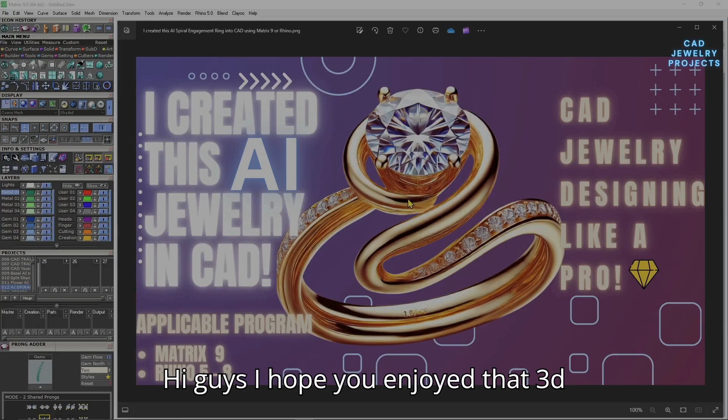Hi guys, I hope you enjoyed that 3D animation. Today we're diving into another jewelry design inspired by an AI spiral engagement ring.

Feel free to follow along as we transform this AI design to CAD production using Matrix9, and applicable to Rhino as well. Before we start, a big thanks to everyone watching and subscribing.

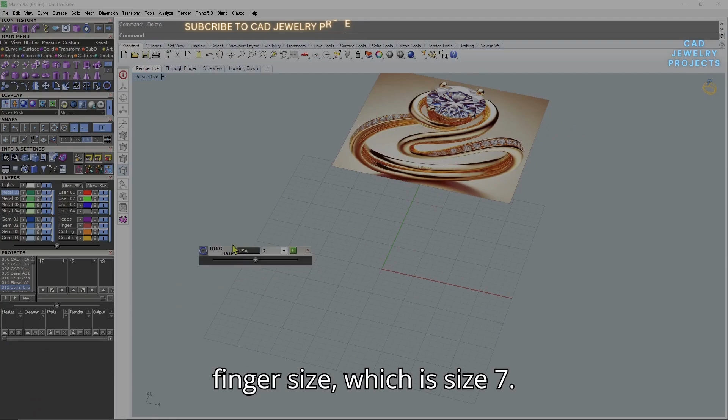Let's go ahead and start with our finger size, which is size 7. From here, let's go to through finger view.

Let's pull out our gem, I would say about 5mm approximately. Then from here, we want to raise this about 2mm from our rail.

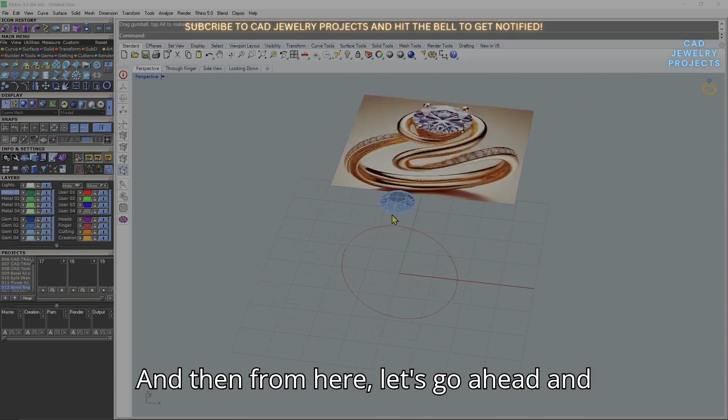And then from here, let's go ahead and create the 4 prongs we have. So from looking at the AI generated image, we got these 4 prongs. So let's go ahead and make that by using interp curve. Let's change it to color green so everybody can see it.

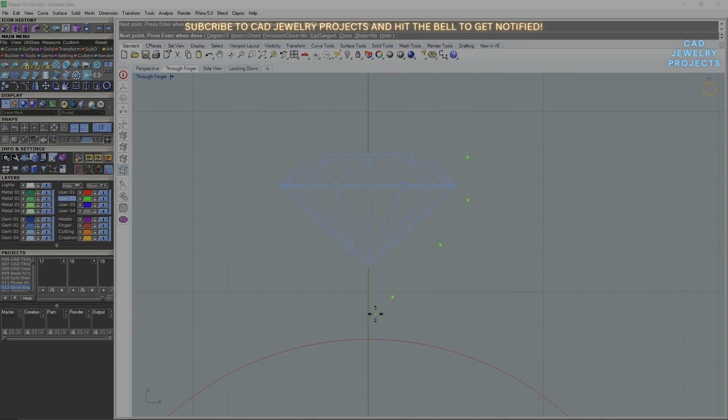I would draw it like this. So this is gonna be for production. So let's raise this up a little bit.

I would start with pipe, about 1mm on the top and then 1.5mm on the bottom. And then from here, let's raise this up a little bit for the center stone as well. Let's change the color of this.

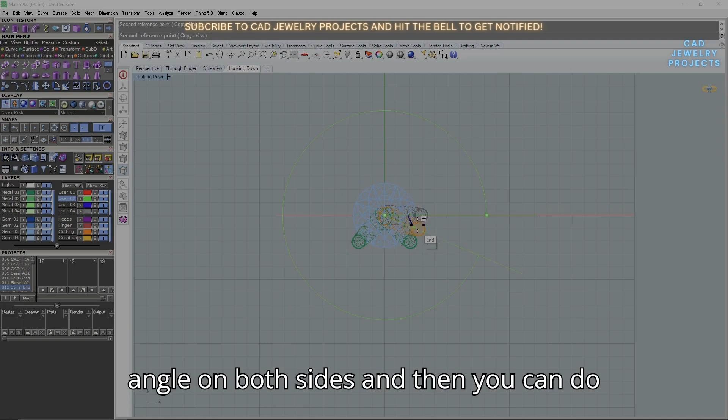Okay, and then go to the top view, rotate copy from a 45 degree angle on both sides, and then you can do the other side too.

So we got our prongs, and then from here we want to draw a cylinder looking at the top, about like so. Right here, let's put this up right here. Okay, from here, let's make this a little bit bigger.

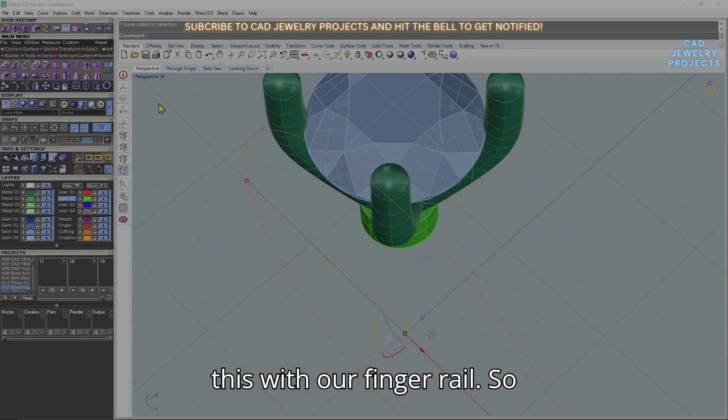And then from here we want to cut this with our finger rail, so extrude your ring rail and then boolean difference with our disc cutter right here. There we go. So now we can use a fillet edge, 0.25.

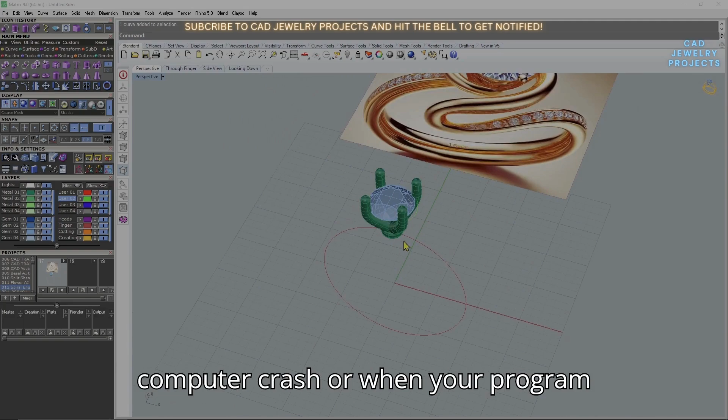That looks good to me. Let's save this so that way we have something to start with when our computer crashes or when your program crashes. All right, so now let's go ahead and create this spiral looking over here.

So let's go through top view. All right, so go to interp curve again, go to curve, interp curve. From here I would draw it from here to here, and I would just guide this circle right here, the center stone, and I would just draw it like so.

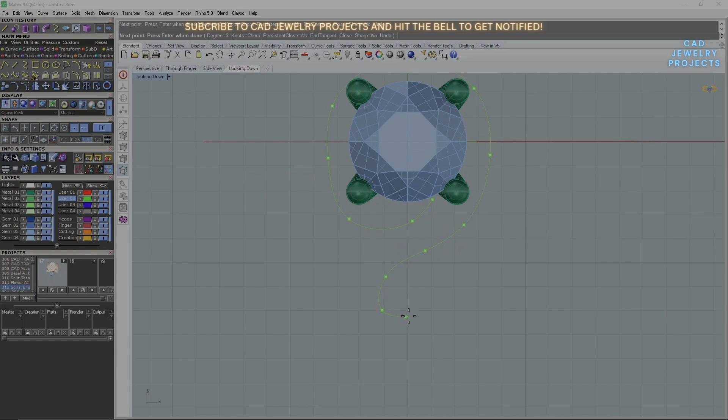Okay, as you can see, it's not perfect, but that's okay. We can go ahead and use control points, and then from here you can adjust your points little by little so that your curve will look exactly how you want it to be.

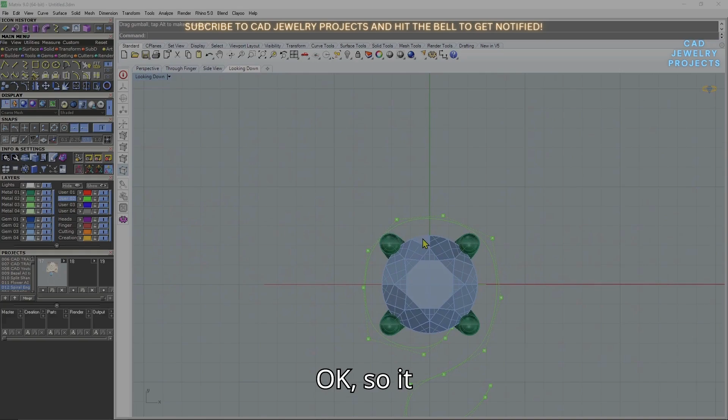Okay, so it looks like it's spiraling around the gem and then going here to here, right? So let's go ahead and do that slowly. You can pause the video if you want, and rewatch any section you want.

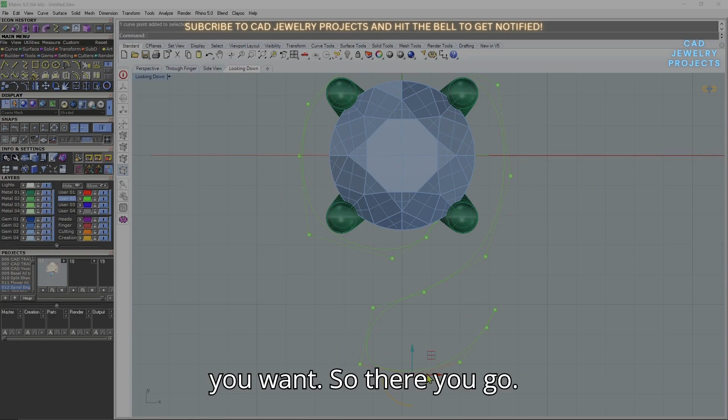Let's put a little bit of space over here. There we go, here to here to here to here. Okay, that's a good start. Let's adjust this a little bit more from here. That's a good start. Let's go ahead and save this again.

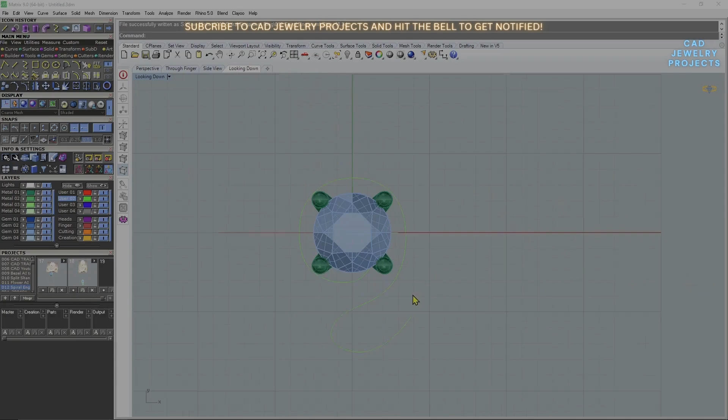From here, what we want to do is use a tool called curve from two views. So what we want to do is select this. It asks us to select curve. So what we want to select is our ring rail and our lines, our interp curve that we just created.

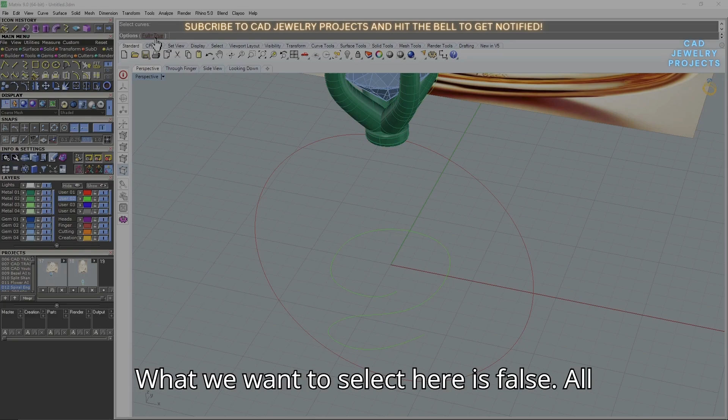Okay, it's gonna ask you true or false. What we want to select here is false. All right, enter again. Here we go.

As you can see, right now it's still a little bit off to me, so I would redo our lines and just adjust the points little by little. From here I would adjust our points.

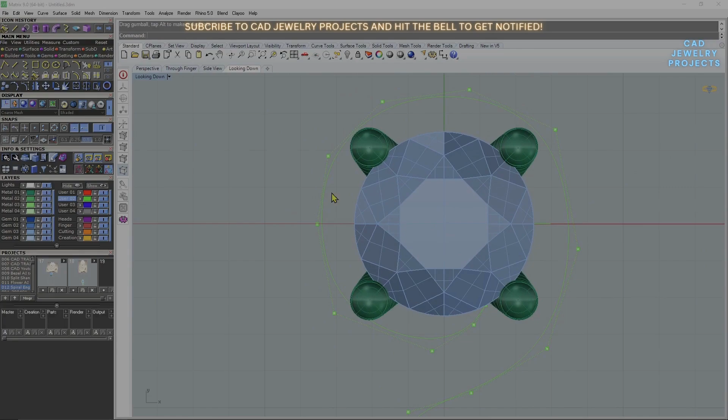Okay, let's go ahead and curve from two views again. False. There we go.

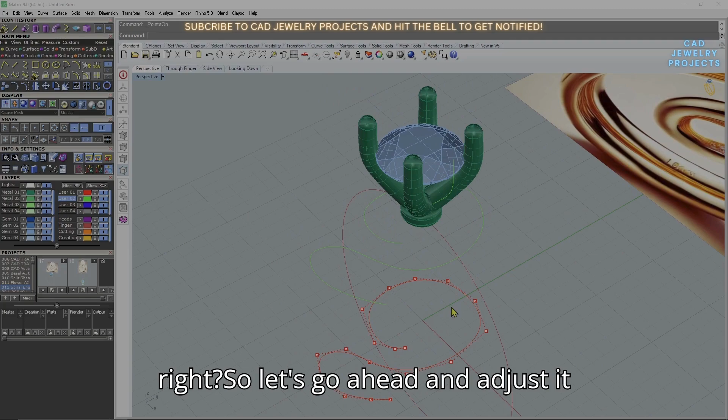Okay, so this is our lines on the bottom, and then the one we have, the lines, the interp curves that we want is on the top, right? So let's go ahead and adjust it little by little until you get the shape you want. Okay, we're almost there. I would just adjust this a little bit more.

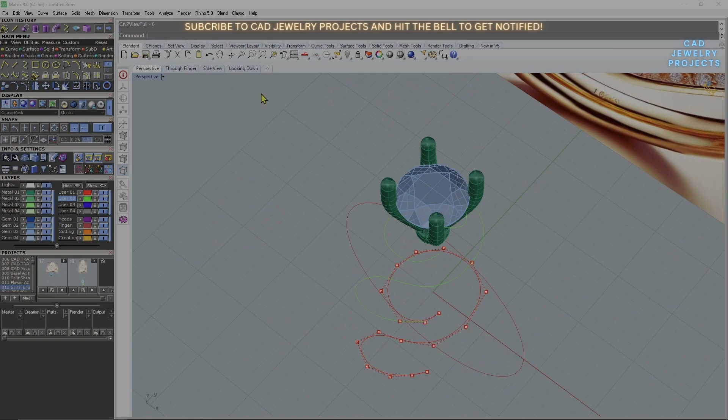I want this to touch our center stone, so that way they're together and they're not, the center stone is not just floating around, correct? All right.

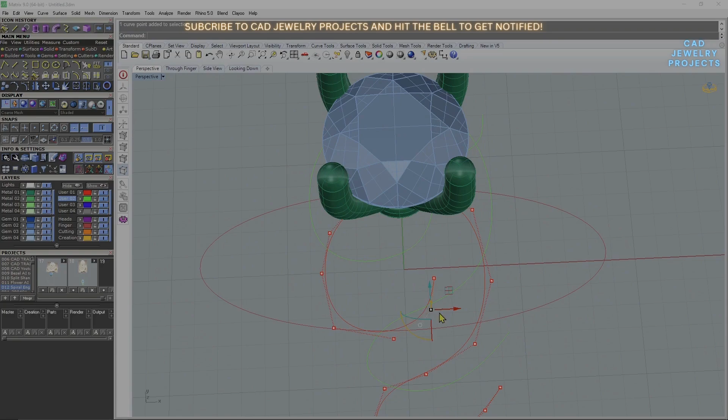Okay, it's a little bit deep right there, so let's bring it in a little bit more, adjust it little by little, go to wireframe. Okay, there we go. All right, that looks good.

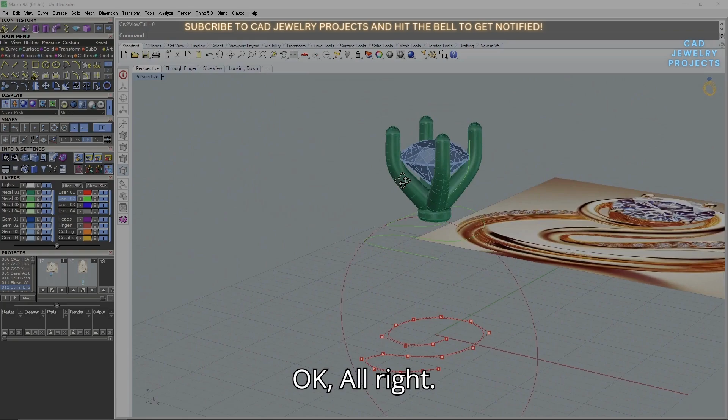Okay, all right, so now what we want to do is I want a line that's connected to here and to here, right? So what I want to do is I want to split our ring rail, split by point from here, and then approximately from here. Okay, so now you have two rail.

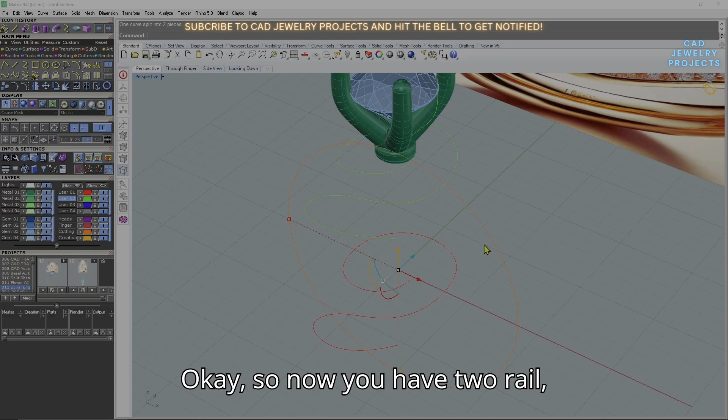Okay, what we want is this to connect to here. Okay, so let's go ahead and save this one first. Okay, so what we want to do is rebuild the line that we have here on the right. We're gonna rebuild it by about 7 and 3.

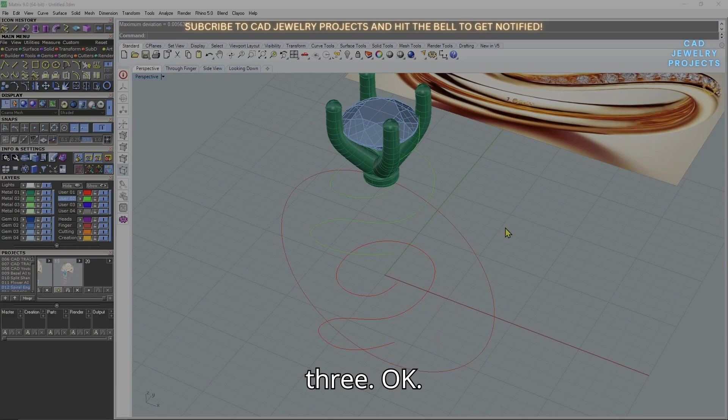Okay, and then from here go to side view, go to side view right here, and then we want to adjust these points little by little and connect it with our line.

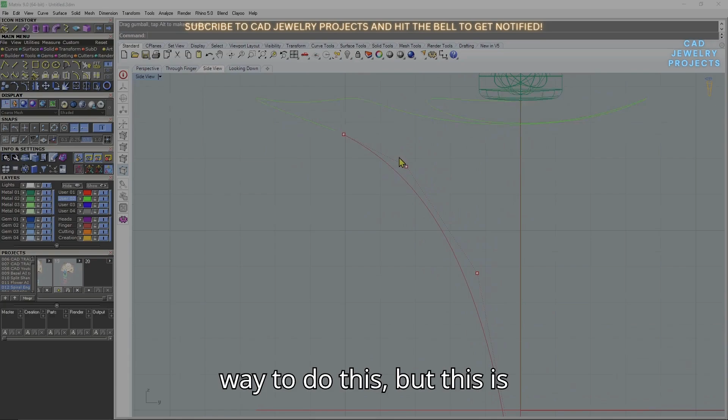Okay, I'm pretty sure there's another way to do this, but this is how I'm about to do this. So yeah, so there we go. You can draw another line over here to here. You can do it that way, but for me, adjusting points really works. I just like how adjusting points makes it easy to flow on the design.

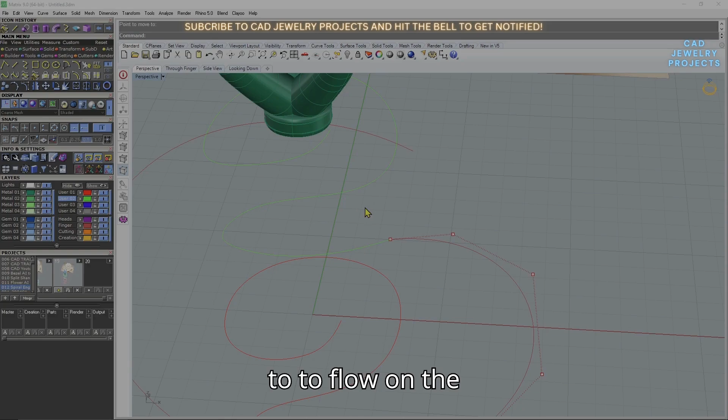So yeah, okay. From here, we want to join this. So we click both curves, both lines, and click join. Okay, so now they're joined.

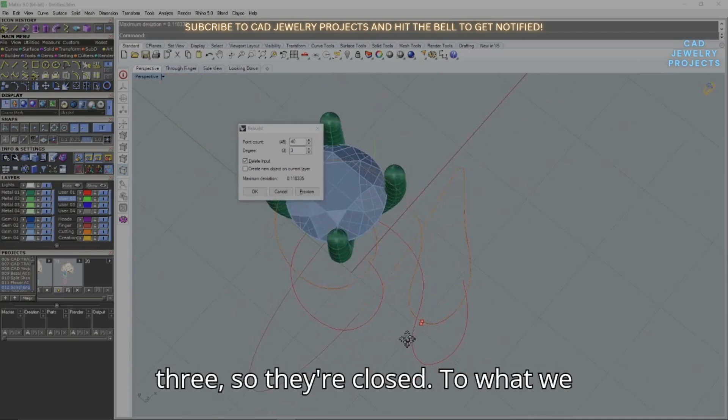So now what I want to see is I want this to rebuild this whole again. All right, we're gonna rebuild this. Those lines that we created, I would rebuild it by 40 and 3, so they're close to what we want. Here we go, and then press OK. All right, so now we have this.

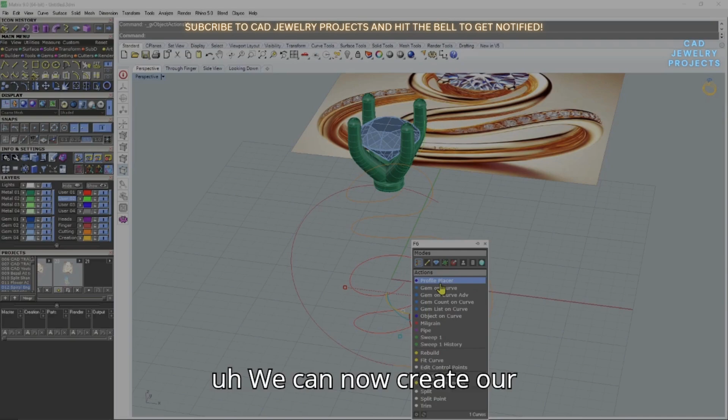As you can see, we have this all lines connected. All right, let's save this now. I'm gonna make this green, save it, and then from here we can now create our profile placer. We can now create a profile.

So select the profile you want. I would select this rounded one. For me, this one looks really well, looks really good. So I'm gonna start here by 2.5 by 1.5. Okay, and then from here I'm gonna add one over here.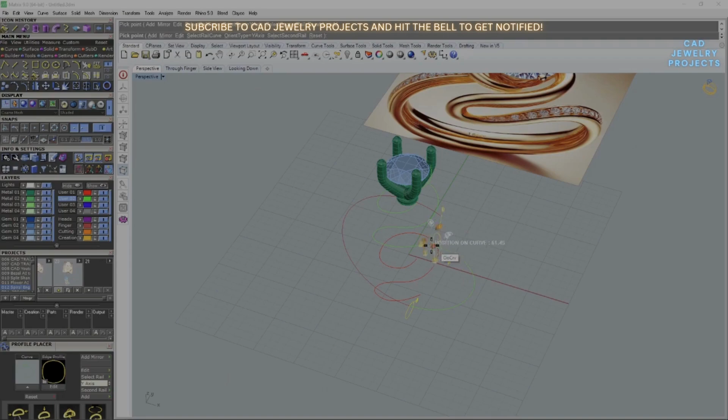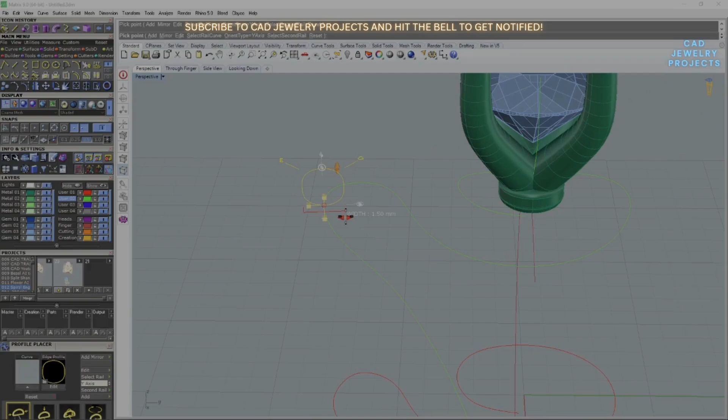We want to add about 1.3 or 1.4. Okay, I want to add this approximately about the height is gonna be 1.5 as well. Let's make this 1.6. No, you know what, 1.5.

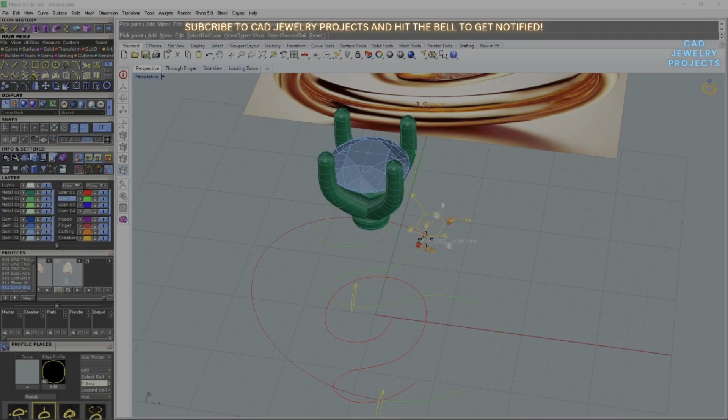And then we're gonna want to add again from here. I want to add a profile over here by approximately about 2 millimeter. Okay, and then we want to add another one to here. Yeah, like so, about same thing.

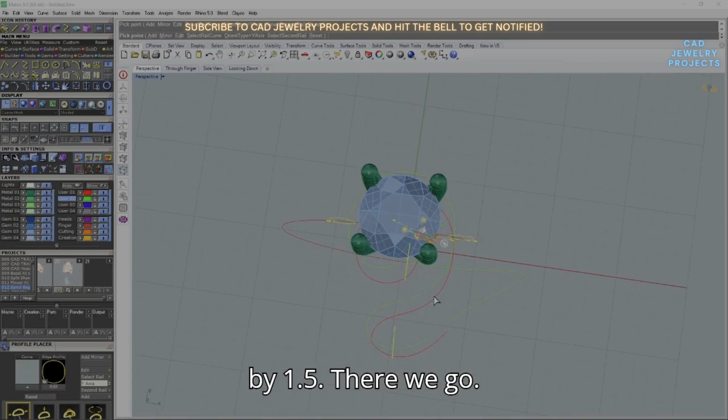And then last one, we want to add profile inside and make this a little bit smaller, about 1.5 as well by 1.5. There we go. Okay, I'll save this again.

All right, and now let's go ahead and use sweep one from here to here to here. Okay, we have double profile over here, so let's delete this. Let's go ahead and sweep one again.

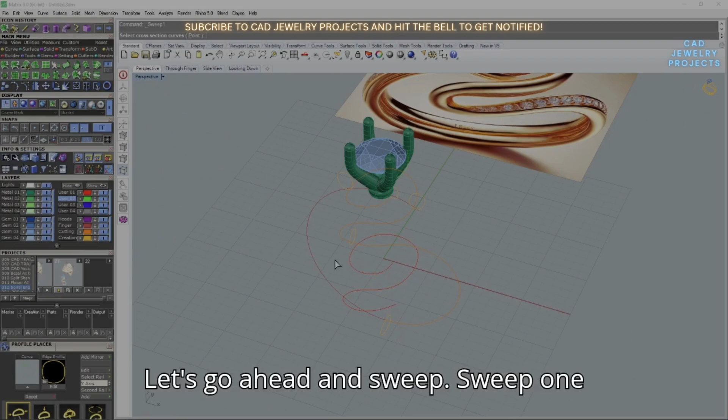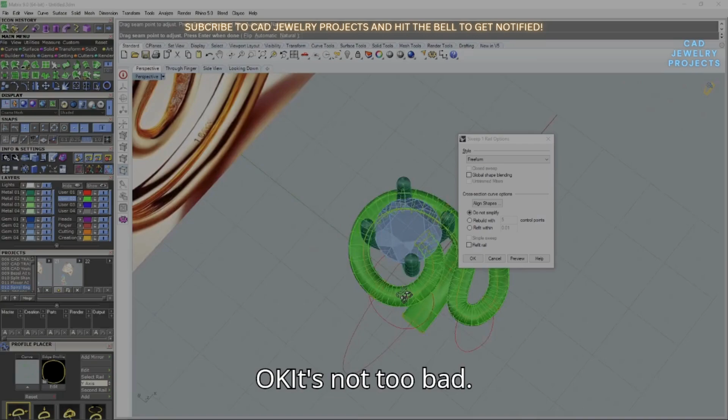Do sweep one from here to this profile, to this profile, to here, and to here. All right, let's see how this looks. Okay, it's not too bad, not bad at all.

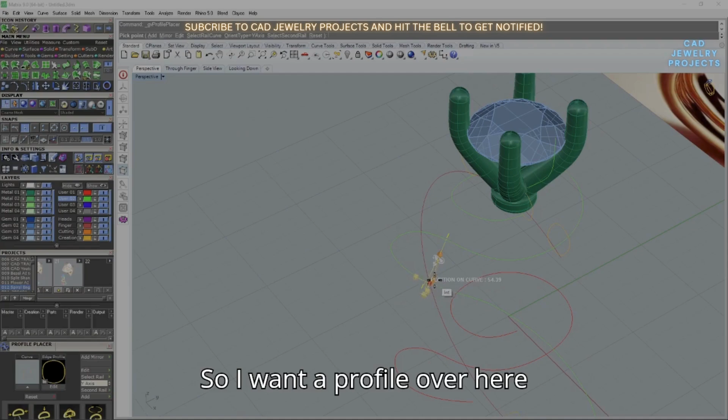And then from here, what I want to do, let's go ahead and delete this. I want to add another profile. So I want a profile over here that's about 1.7.

And then I want another profile over here a little bit smaller. I would say about 1.3. Yeah. All right. So let's save this again.

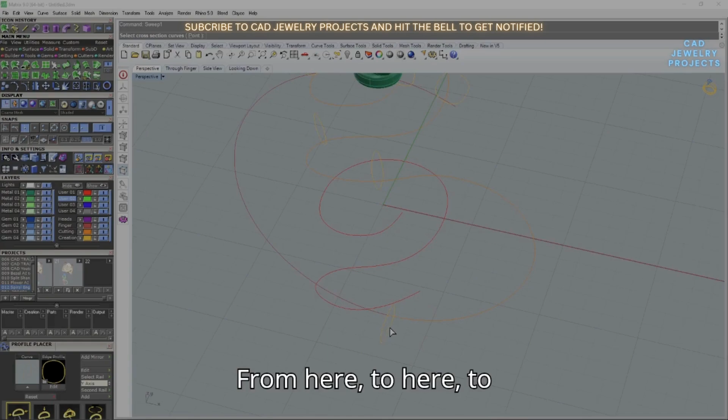Let's do another sweep one. Okay. From here to here to here, here to here, to here. Okay.

Okay, let's point this on our quad on the bottom. Okay, here we go. That's not bad.

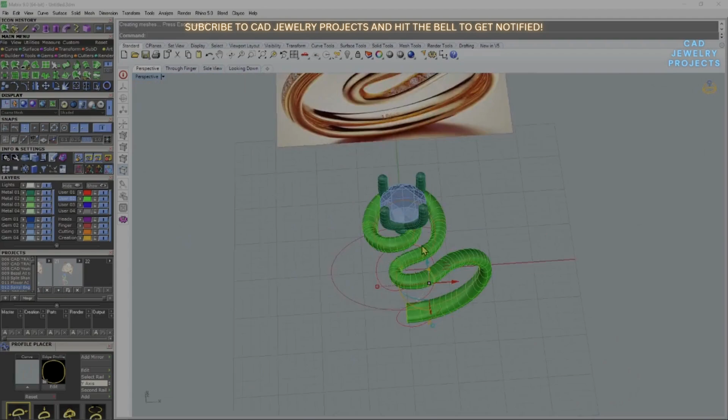Let's change the color of this. Let's put a profile cap in the center right here. Okay, not bad, I like this. I like how this turned out.

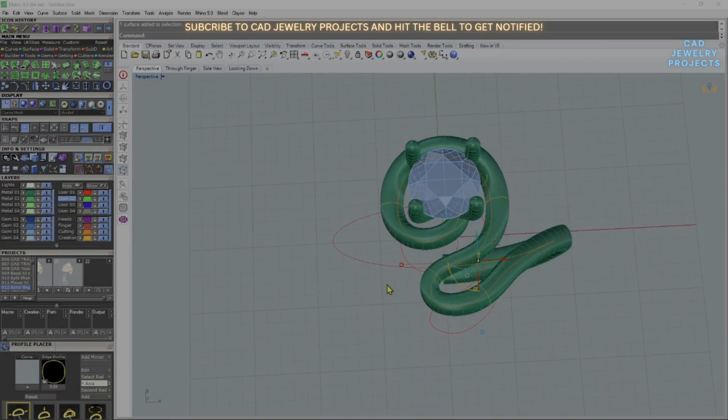Actually, we want to make this a little bit, not too far from our center. So I would go back here, or we can adjust the profile that we have, roll it. Oh, there we go, should do it. Yeah, adjust it a little bit more. Let's look at it from top view. Okay, there we go, that did it.

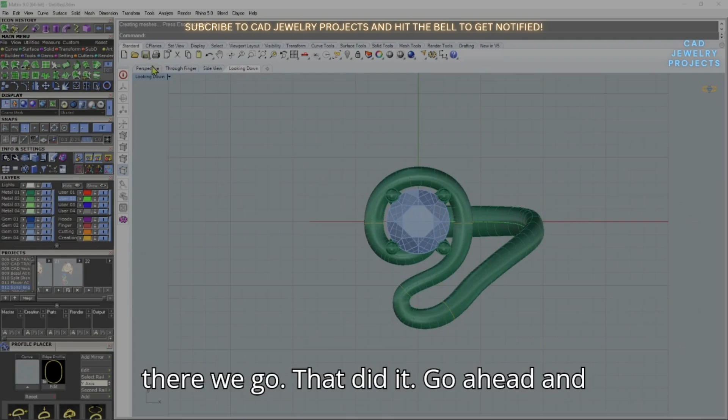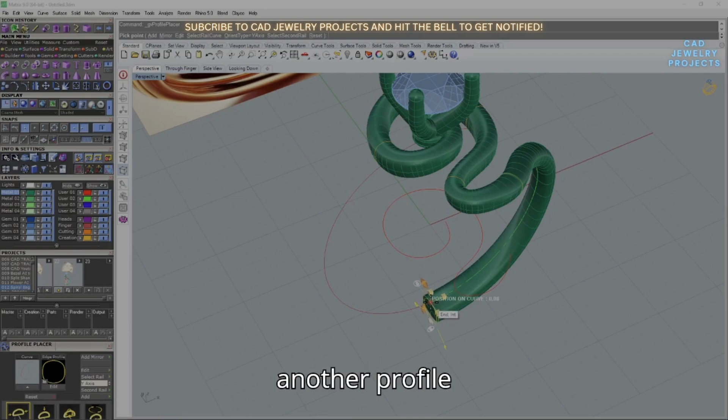Go ahead and save this. All right, we want to join this cap and this one, join. Okay, and then from here we want to do a cap planar. All right, so that way we close it, and then now we can make another profile to go over this way.

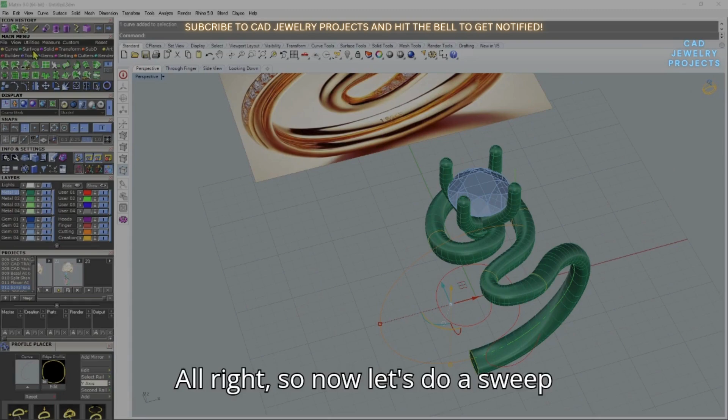What I want here, I want this to be approximately about 1.7 width, approximately 1.7 width by 1.6. There we go. I want this to go inside. All right, so now let's do a sweep from here to here, the inside. There we go.

All right, there we go. We're almost there. Yeah, we're almost there, we want to go ahead and save it again. Let's do a cap planar again.

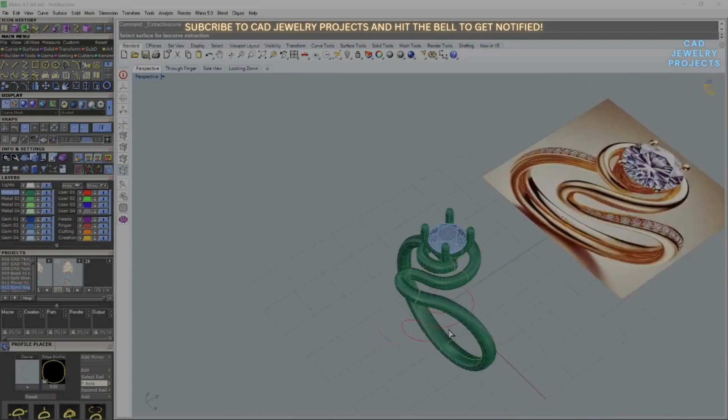So we close it. So now let's create those gems, those side stones, right? Let's go ahead and click here, and then I want one iso - oh yeah, we extract an iso curve over here and over here. Okay, let's make this green so that way everybody can see it.

Then from here, I want to pull out a gem on a curve. Gem on the curve, make this taper. Okay, taper it, let's bring this down to approximately about 1 millimeter. Then over here, about like so, about 1.2. Spacing about 0.1. Alright, offset this, let's put them inside.

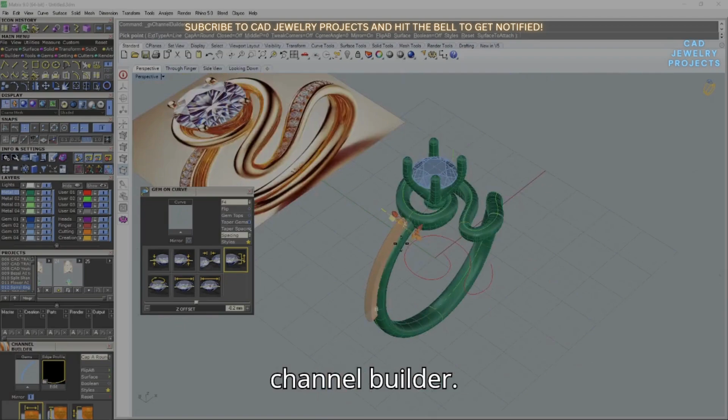Do a channel builder. For a channel builder, I would go to the style. Let's make this the second one right here, select the second one. Okay, surface, all right. Pull this up. Okay. Let's not do a mirror, put it down here, here. Let's do extension to here to here, all right, extend it that way. There we go, all right.

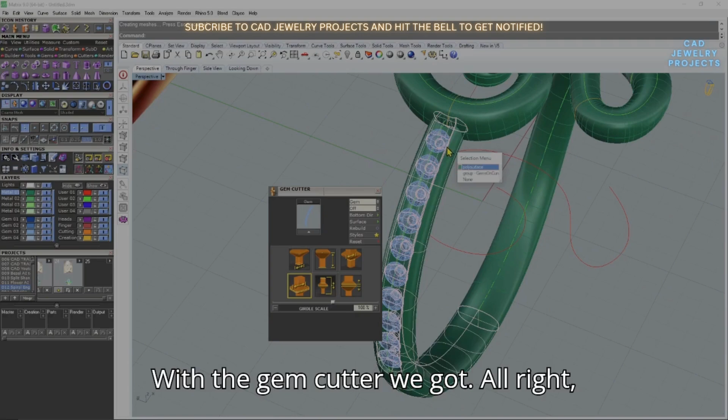All right, from here, let's do a prong adder. Okay, like so. Still nudge it, here we go. Here we go, make this a little bit smaller. All right, there we go, created this side. So now let's do this last part, this right side stones. Let's go ahead and save this.

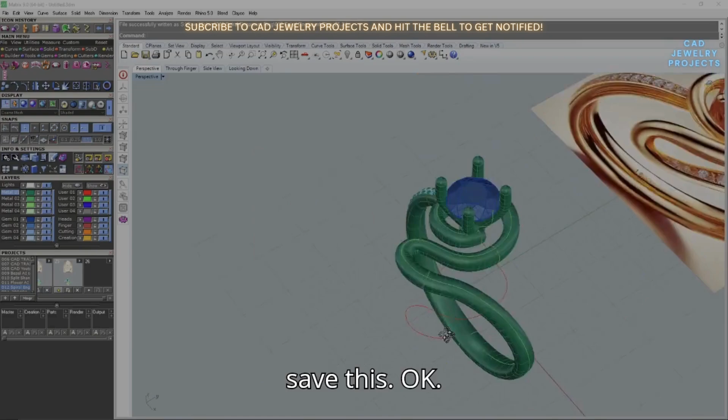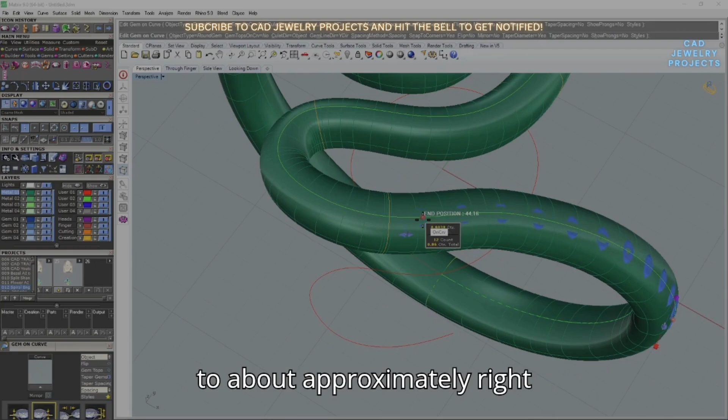Okay, all right, what I wanted to do is I want to do a gem on a curve again. Profile. Gem on a curve, about 1 millimeter again and to 1.2. Okay, let's look at it on the side, I would say about that way. Okay, let's see how far this one - okay, it looks like that, so we want it to about approximately right here. Okay, all right, we're gonna do the same thing like what we did on the other side.

Actually, let's make this 0.1 spacing. All right, channel set. Here we go. Looks good, extension, let's bring it down. Too much extension. All right.

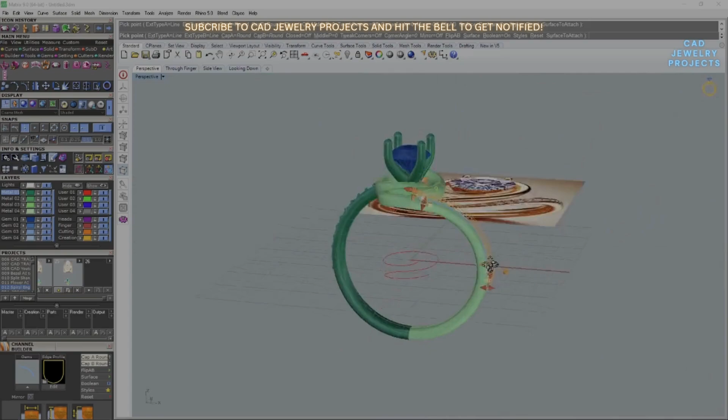Okay, let's create the same thing. We're gonna create the gem cutters from here. Okay, enter and then cut it with our gem cutter. There we go. And finally, let's create the prongs. All right, that looks good.

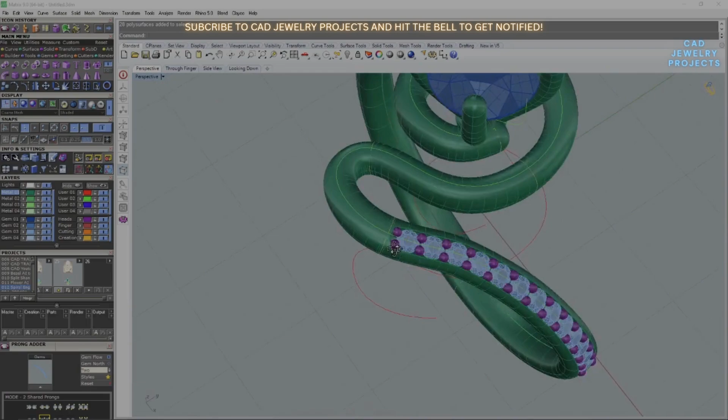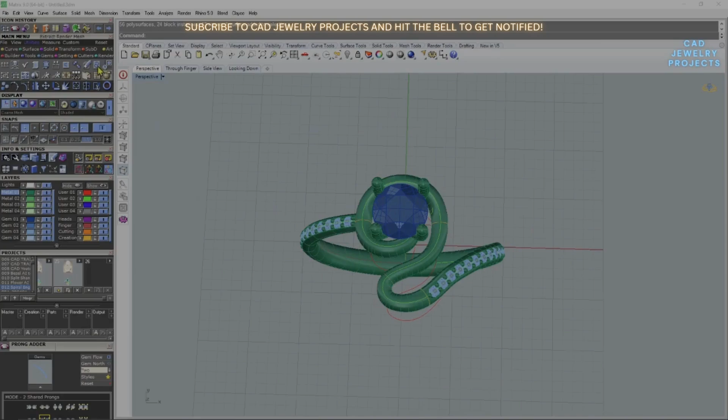Okay, this one we want to go ahead and ungroup, delete this, ungroup again. Want to go to gem view. From here, let's adjust this and just make this single prong on the end. All right, let's see how this looks. Save this, change all this to yellow. There we go. All right guys, we got it.

It's almost the same, right? Yeah.

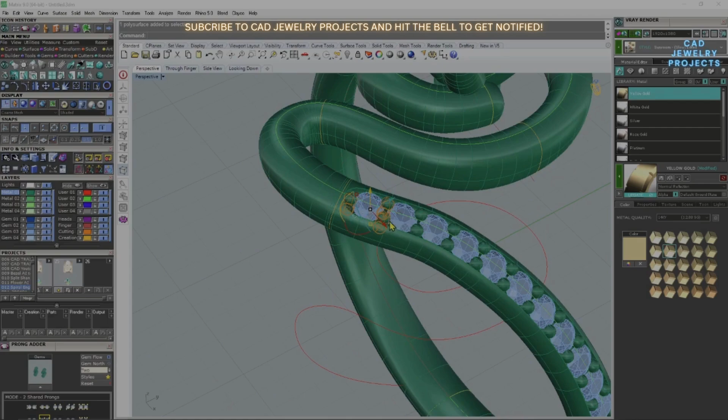Okay, so I forgot, this one is gonna be for production. If it's gonna be for production, let's go ahead and delete this again. Okay.

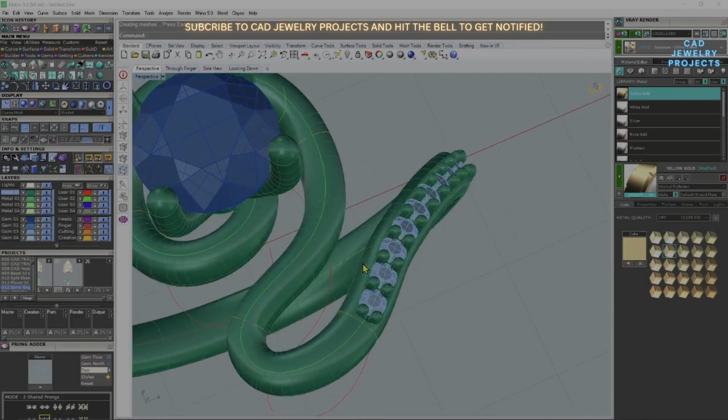Let's select all the gems here, make that prong, and for production, bring it out approximately about 0.6 height. The small one about 0.5 height. All right, and then here, same thing over here. I want to do edit, let's bring it up, let's bring this up again. Okay, and there you go.

You can, for sure, your jeweler will be able to set this.